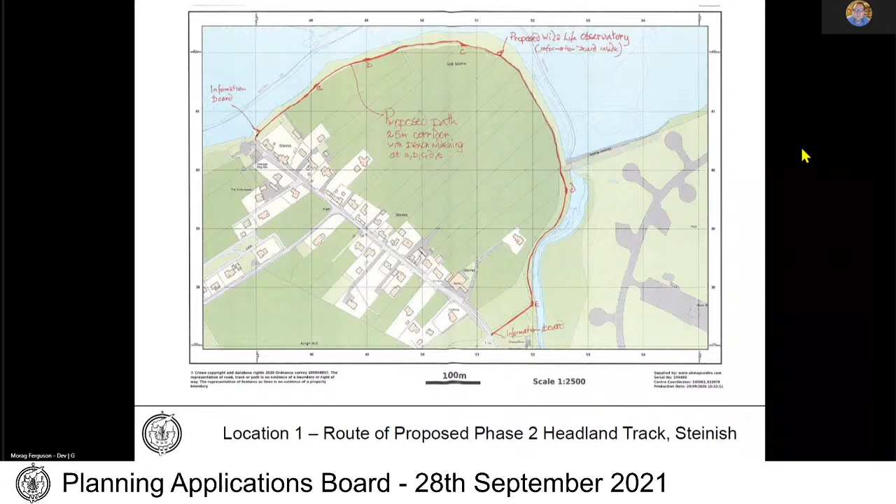A number of detailed objections were received in relation to the development. Some were related to procedural and legal concerns, for example not having secured the rights from crofters to undertake the works. I would advise members that these are matters for the developer to negotiate outwith the planning system. The planning system is concerned with the use of the land; the legal right to use the land is a separate matter.

There were very detailed objections in relation to the potential impact on the site of special scientific interest, on the habitat, and on the birds that feed on that habitat.

There were other concerns related to the principle of the proposal, its impact on the character of the Steinish village, its wider environmental impact, the impact on croft land and the ability of crofters to use that land both for rearing stock, principally for lambing, and for cropping, impact on the grazings, the effect on neighbour residential amenity, and also concerns regarding transport and parking and the safety implications of the path.

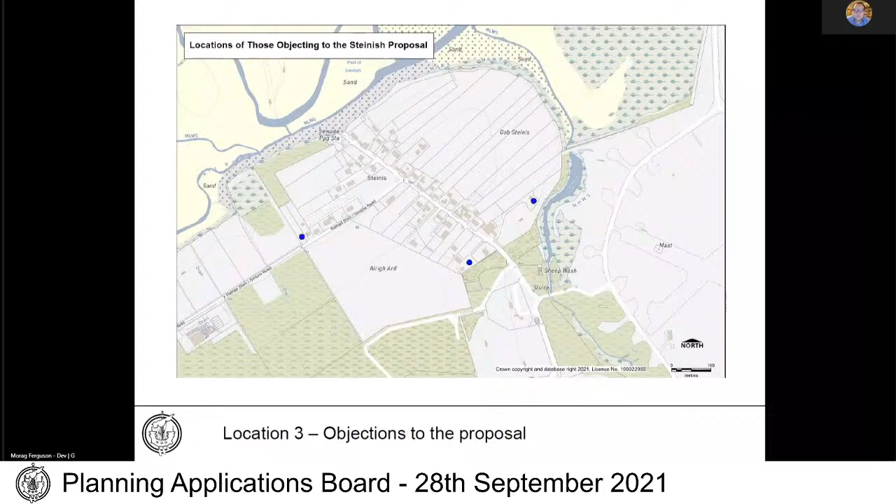The site itself is immediately adjacent to, but is out with, the Tong Saltings SSSI.

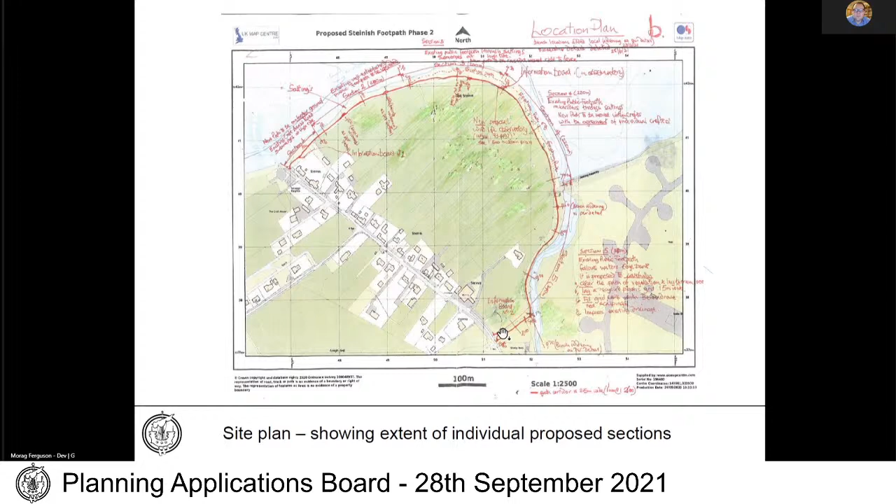The next few slides detail the construction of each section of path. This first section follows an existing croft access, public footpath along the shore. The new footpath will be constructed on the grassland just above that. It also shows that the site boundary is about a 2.5 metre corridor, and within that the path itself would have a 1.5 metre wide footpath, with some grassed verges.

This next section, again, the existing footpath would be upgraded. There would be local widening here and here to accommodate benches.

The third section is currently fairly undefined because it goes along the saltings. This section would be brought inland, just below the existing fence line. Again, there would be areas of widening to accommodate benches, and at the far end of section 3, there would be a deck as an observatory for viewing the wildlife on the saltings.

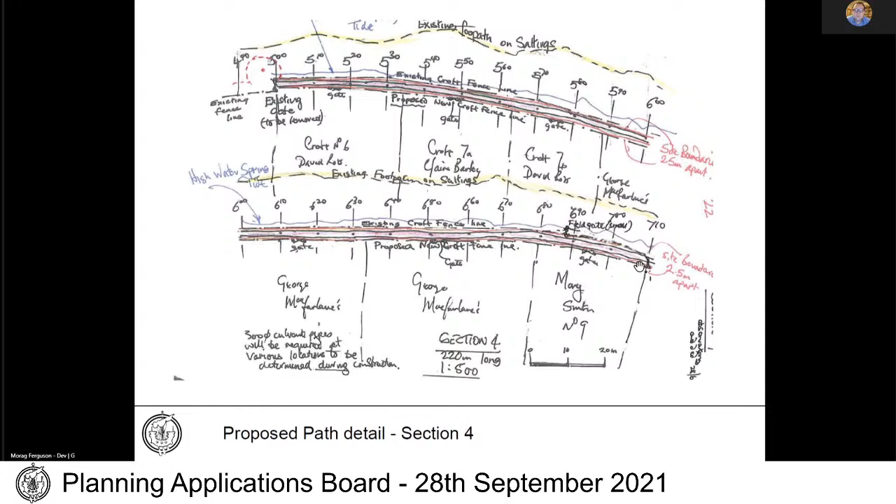Section 4 is the section that would come inland onto the crofts. Each of these is a croft - you can see croft 6, 7A, 7B - and each croft would have a new gate at the end, with a new fence constructed along that line to ensure both pedestrians and people walking dogs would be out with the croft fence lines.

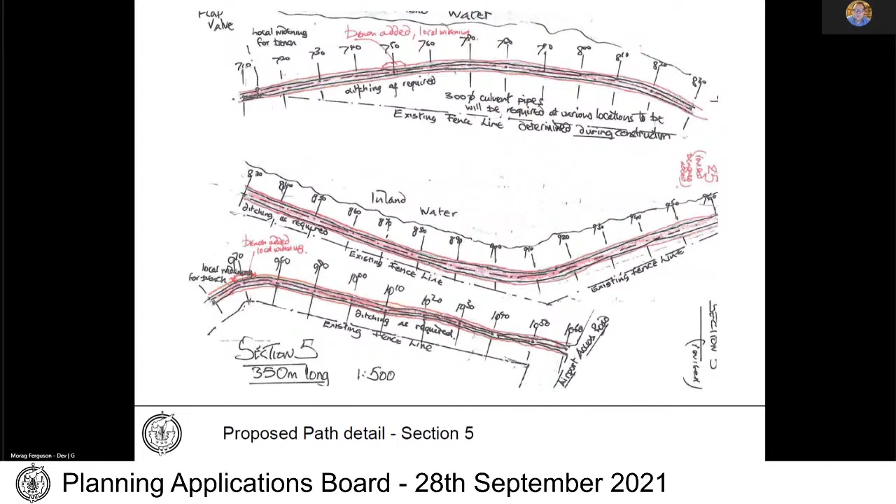Section 5 is the last section. This section moves out with the existing fence line again on the grassland - quite a narrow piece of ground to construct on. This is the canal running along here. The intention is that the path would be outside the existing fence line, between it and the canal, and come in to join with the road.

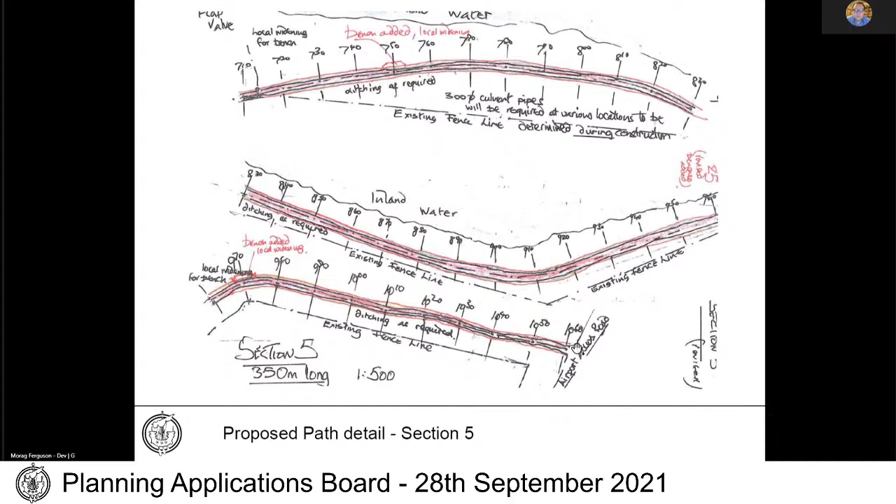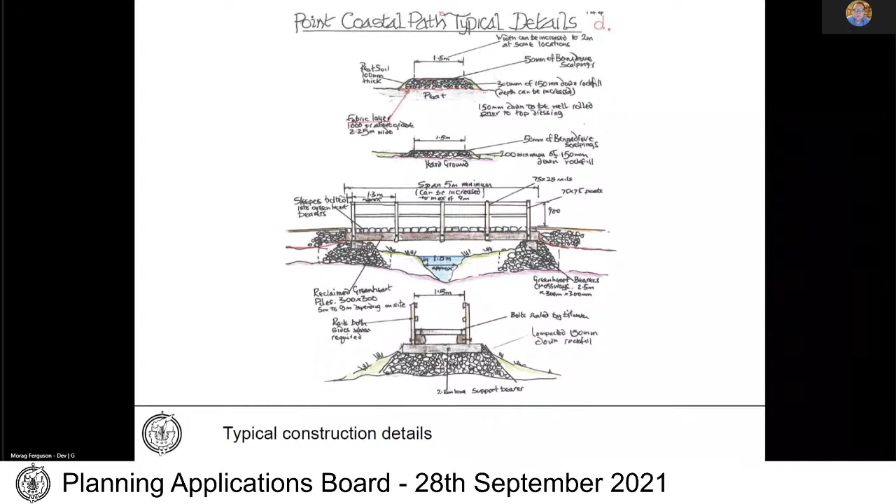There's now a series of photographs - sorry, these are just the construction details. The path itself is largely founded on a peat base, with a fabric layer like terram, then an area of build-up above that, and a dressing of scalpings on top. Verges would be dressed off. There's also one section with a bridge section that would be of reclaimed greenheart timber, and a cross section of the bridge at the bottom.

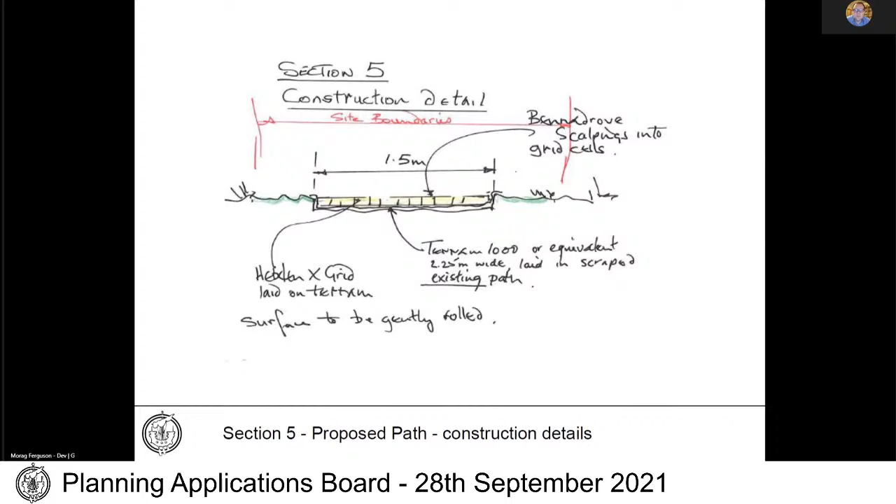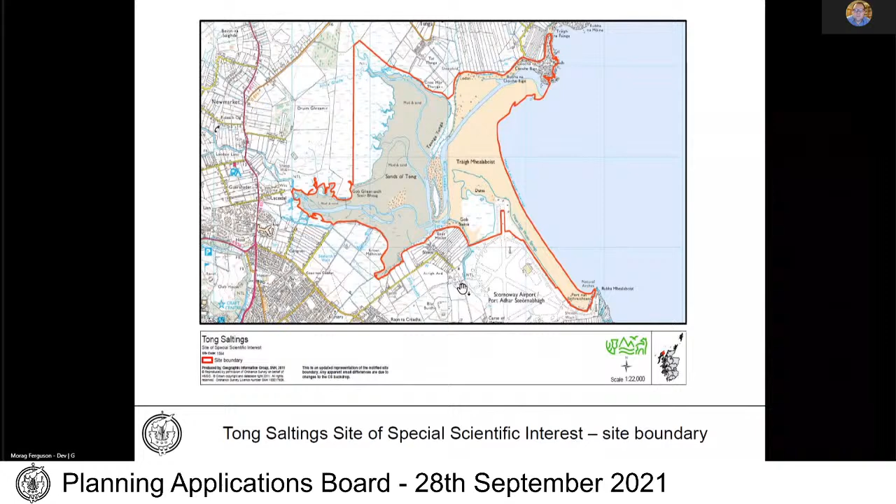This slide shows the extent of the Tong Saltings site of special scientific interest. You can see that the airport is here just beyond the village of Steinish, and the path is intended to go around this headland and come back inland along the canal to join with the road and the other footpaths.

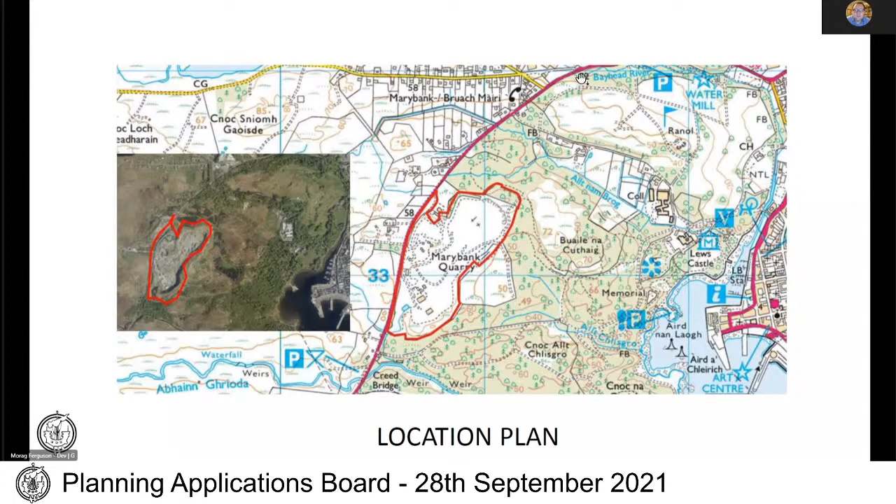The slide is an aerial view, and it's just an indication of the actual size of the quarry, just to give members a sense of the scale. You can see that the quarry is in the centre of the slide here, and if you compare it in terms of area, it's very similar to the whole area of Stornoway Harbour. So it just gives you a sense of how big the quarry is.

The quarry itself is not terribly visible from viewpoints from the main road. From the Lewis War Memorial, when you're at elevation you can actually see some of it, but largely the views are from the edge of the quarry, from within the castle grounds, where it is fenced off for safety reasons.

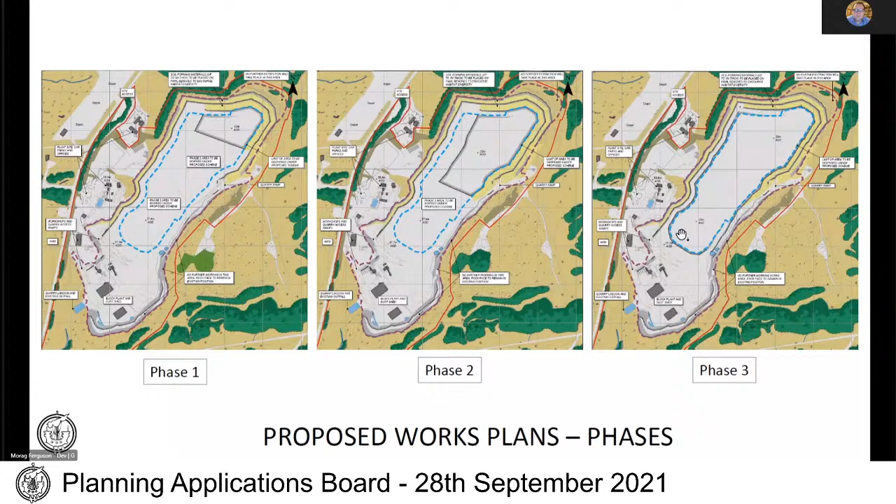So the proposed works are in 3 phases. Phase 1 of deepening would first take place in the north end of the quarry here, where they would go down a level and create a bench to work from. The next phase would take the deepening here, and eventually the third phase, some years off, would extend that along the whole of this area outlined in blue.

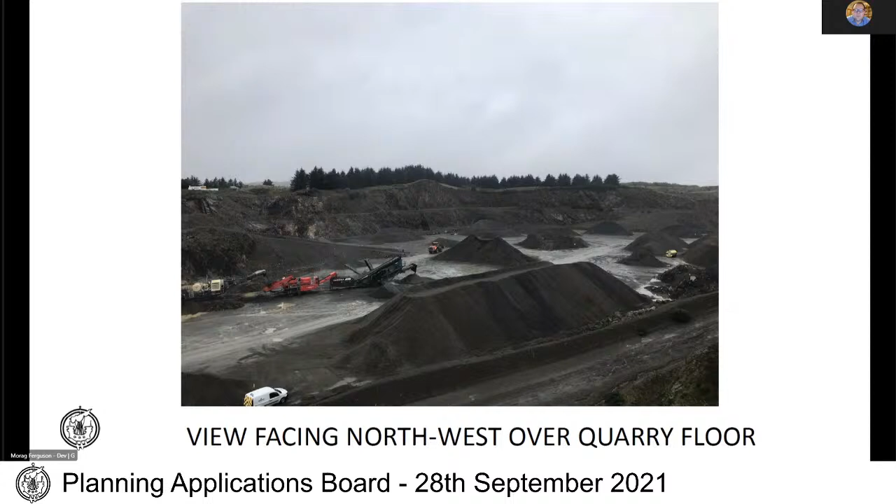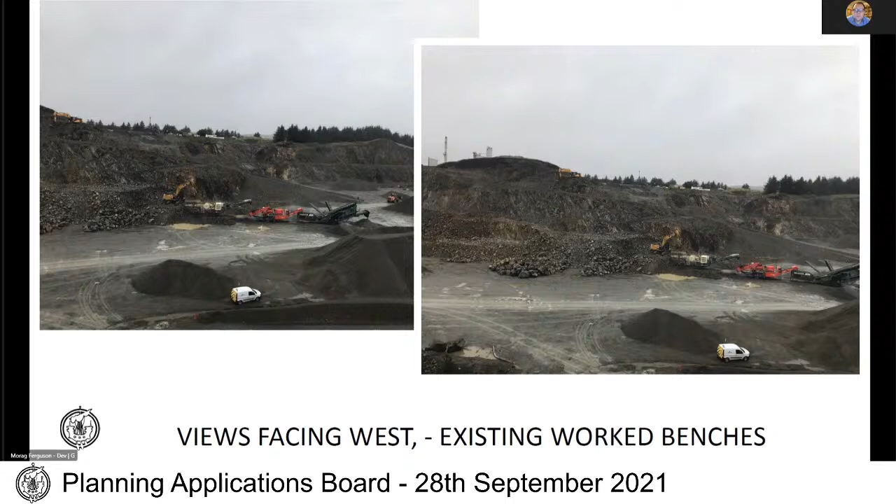So if I just take members briefly through the report. As I said, the application is classed as a major development under the hierarchy of developments on account of the scale of the quarry. The site area for the development is 6.1 hectares.

Access, parking, water management system, and all other auxiliary buildings are already in place. To the north, south and east, the site is bounded by Stornoway Trust land, part of the Lewis Castle and Lady Park designed landscape, and to the west it's bounded by the road.

There were no representations received from either consultees or from any third party. The council is required to determine the application in accordance with the development plan unless material considerations indicate otherwise. The assessment concluded that the development is in accordance with the key strategic policies of the plan. Material considerations have been given due consideration, and recommendation is made that the planning application be approved subject to conditions to mitigate the environmental impacts of the mineral working.